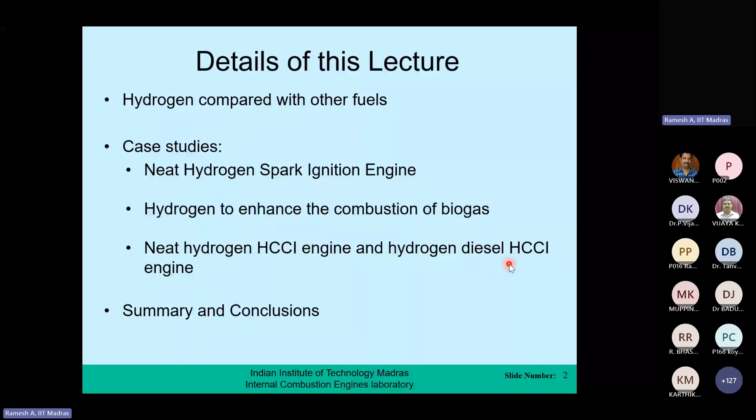Now, we know that hydrogen is the simplest of all fuels. It is abundantly available. Unfortunately, it's not available in the free state; it's available in combination with other elements. So we need to really separate it out and bring it out, and that needs some energy, as we all know. It's a clean burning fuel.

It does not by itself produce any oxides of nitrogen, hydrocarbons, or carbon monoxide, so it's a clean burning fuel. Of course, when you burn hydrogen in air, the oxygen in the air can combine with the nitrogen in the air and form oxides of nitrogen. But as a fuel, it doesn't produce anything which is harmful.

Then it has got a very high flame speed, meaning its combustion rate is extremely high. This in an engine leads to good thermal efficiency. In an engine, we all know the combustion has to be rapid for efficiency to be high, and high flame speed automatically gives rise to good thermal efficiency.

Hydrogen also has wide flammability limits, which means that you can use a small amount of hydrogen and a large amount of air, and you can also use a relatively large amount of hydrogen and a relatively smaller amount of air. Still, hydrogen will burn.

This makes it very attractive from the point of view of an engine, because you can now do what is called qualitative control, like how we control a diesel engine. We don't have to use a throttle. It can also enable burning very lean mixtures, that is, a lot of air and less fuel, which means high efficiency because combustion can be complete, and you also get low levels of emissions, particularly oxides of nitrogen.

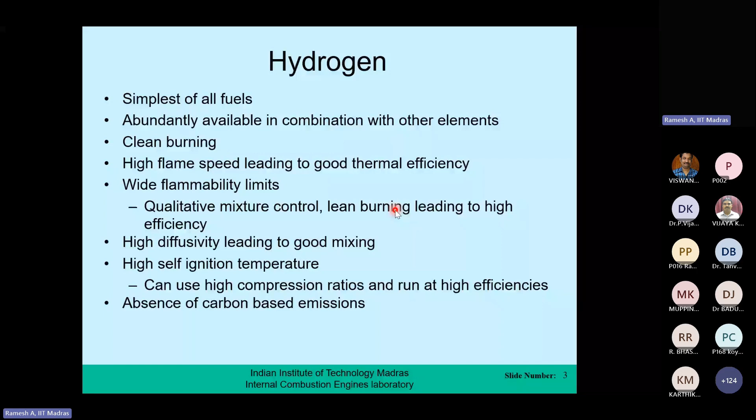The spark leads to a very high temperature, initiates the combustion reactions, which become exothermic and self-sustaining. Then you have a flame, which moves through the air, radially from the spark, ideally. This flame is basically a region where the reactions occur, and if the reaction rate is high, the flame can propagate fast. So in a hydrogen engine, in a hydrogen-air mixture, the flame propagates quickly and goes towards the end of the combustion chamber.

On the combustion chamber wall, since the temperature is low, there can be a small amount of fuel left unburnt, and we call this wall quenching. In a normal gasoline engine, it leads to hydrocarbon emissions, but in a hydrogen engine, it will of course lead to some hydrogen coming out.

In a normal engine, what happens is the end gas—as this flame is propagating, the surrounding gas gets compressed because the pressures go up, and it also gets heated because of heat transfer and compression. The surrounding air-fuel mixture can auto-ignite on its own, suddenly, even before the flame reaches it, and that we call knocking.

In a hydrogen engine, this is less likely to occur because the flame propagates fast and doesn't allow this auto-ignition. Also, this charge does not auto-ignite easily because its self-ignition temperature is high. So this kind of knocking does not occur, but the normal flame propagation itself becomes so fast that combustion can be very rough and look like knocking. So hydrogen combustion leads to knocking, but that knocking is not like gasoline engine knocking—it is just the fast combustion that results in knocking.

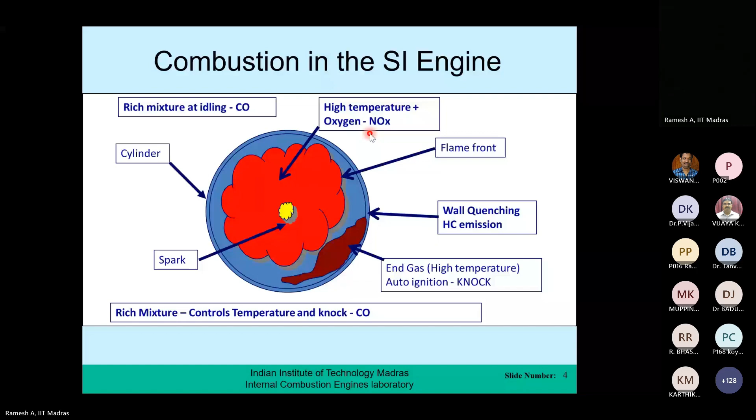The fuel properties required for an SI engine are mainly governed by the mixture. The SI engine uses a homogeneous fuel-air mixture, so it needs a fuel that can easily mix. Hydrogen is an ideal fuel for this. A spark initiates a flame, giving high combustion rates which can lead to high efficiency, close to the Otto cycle.

High combustion rates are associated with fuels that have a high flame speed. That is, high combustion rates mean high flame speed. The start of combustion is controlled by the spark.

The air-fuel ratio, or equivalence ratio, is another important parameter, and the charge is normally throttled to control the output of the engine. That is, you normally control the air and fuel going into the engine to control the output.

But in a hydrogen engine, this is not required, because you can have a wide range of air-fuel ratios. It's enough to only control the fuel and not the air, and still the engine will run. This is a big advantage.

Knocking is a problem that limits performance. In a gasoline engine, HC, CO, and NOx are the main problems, but in a hydrogen engine, NOx is the significant problem.

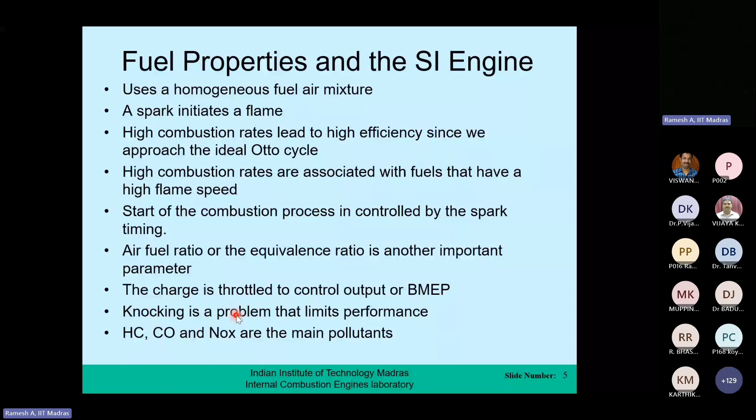Now, coming to the CI engine, which is also an engine where you can use hydrogen, you have a central combustion chamber, a fuel injector, and you compress only air.

At the center of the combustion chamber, normally you have a fuel injector, and this fuel injector sprays fuel at high pressure. The fuel atomizes, mixes with air, then self-ignites.

That means the fuel required for a diesel or compression ignition engine should have a low self-ignition temperature. Hydrogen has a high self-ignition temperature, so it is certainly not the fuel for a CI engine, but it is used in the CI engine in different ways.

In the CI engine, there is a spray, then fuel droplets, and fuel droplets mix with the air and burn. But that is not the case with a hydrogen CI engine, because you cannot just inject hydrogen like this into an engine.

So the point to note here is that in a CI engine, direct use of hydrogen is not so easy, because hydrogen does not self-ignite. You have to indirectly use hydrogen in a CI engine, unless you are using very, very high compression ratios.

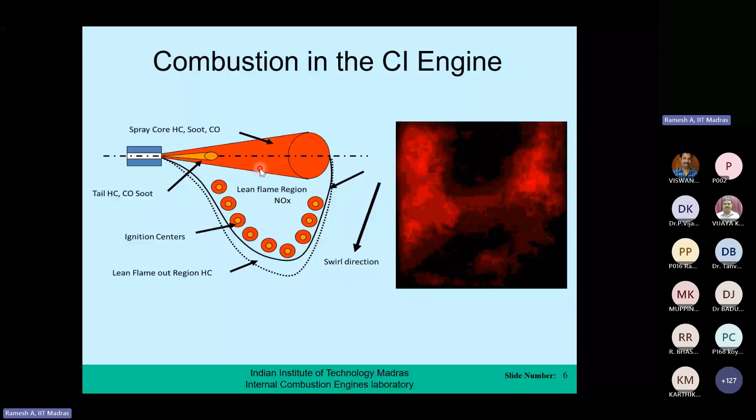For the CI engine, air alone is inducted and compressed. Fuel is injected at the top dead center, and the fuel needs to have a high cetane number. The fuel, spray, and air motion are all important.

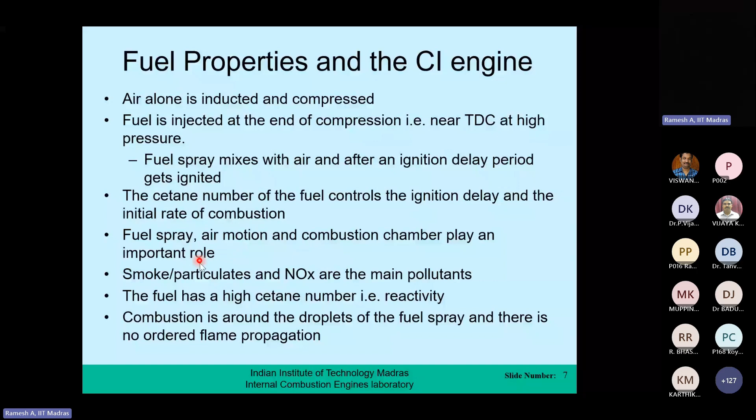Normally in the CI engine, you have smoke and NOx, and this fuel has to have a high reactivity. Cetane number is associated with reactivity, and hydrogen does not have high reactivity. It needs a very high self-ignition temperature to initiate combustion, but after that it becomes quite fast in the combustion process.

So given this, let us now look at the properties of hydrogen and compare them with different fuels, particularly natural gas, since it is another widely used fuel. Hydrogen is a simple fuel with no hydrocarbons in it, whereas hydrocarbons can produce different combinations and emissions, which is certainly not the case with hydrogen.

The heating value of hydrogen is extremely high: it's 50 megajoules per kg for natural gas, and 120 for hydrogen. That means per kg of hydrogen, you can release very high levels of energy.

Unfortunately, its density is extremely low, so the volume of hydrogen required to be stored, even for unit mass, is extremely high. This actually offsets the advantage of its high calorific value.

In one conventional cylinder where hydrogen gas is stored at about 200 bar, you can store very little hydrogen, something like 0.6 to 0.7 kg, depending on the pressure, which is insignificant compared to how much you can store in a gasoline cylinder.

So from the point of view of storage and transportation, hydrogen has some problems. The flame speed of hydrogen is extremely high, many times higher than natural gas, meaning combustion can be completed almost instantaneously. This can lead to very high efficiencies, but it can also lead to very high rates of pressure rise and knocking.

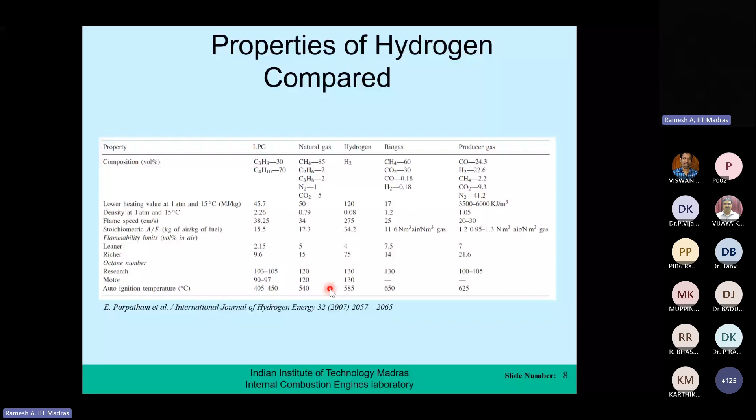Now if you compare hydrogen and gasoline when it comes to a spark ignition engine, I'll not go through all the properties, most of them are common. If you look at the density, you see the big difference - hydrogen has a very small density, gasoline being a liquid has a high density. The limits of flammability are wide, not so wide. And then the ignition energy that is required.

This is another important property of hydrogen. The amount of energy that you require to ignite hydrogen is extremely low as compared to gasoline, significantly lower. This is an advantage because it can be easily ignited, but it's also a disadvantage, because even a hot spot in the engine would undesirably ignite it and lead to problems of combustion. So this is good and bad - good from the point of view of proper ignition, but bad from the point of view of ignition control.

And if you look at the auto ignition temperature, it is significantly higher than gasoline, which is an advantage in a spark ignition engine. The adiabatic flame temperature is more or less comparable to gasoline. And you can also see that the octane number is extremely high, much higher than gasoline.

Another important thing you see here is the flame quenching distance, which is the minimum gap through which the flame can pass. A gasoline-air mixture flame cannot pass through a gap less than 0.2 centimeters, whereas in the case of hydrogen, it can pass through a gap of 0.064 centimeters. That means any small gap can also enable hydrogen flame to pass through, which is again not a desirable feature from the point of view of safety.

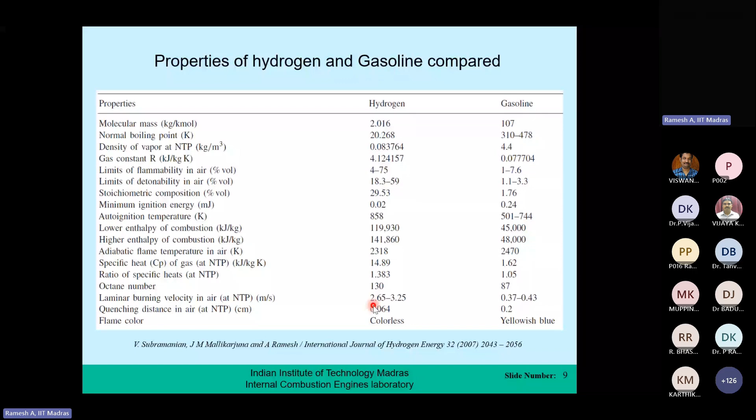Coming to the important properties of hydrogen: the low ignition energy requirement allows engine operation with lean mixtures without misfire, but it can also lead to some safety issues. The very high flame velocity again enables lean burning and high efficiency, but it can also lead to knock. Its high auto ignition temperature is desirable because it will not lead to any knock in a spark ignition engine - desirable from the SI engine point of view, but not desirable from the compression ignition point of view.

Another important thing with hydrogen is it is prone to surface ignition - any hot spot on the engine can very easily ignite hydrogen, causing pre-ignition and undesirable ignition, which is again a problem. Its energy density on the mass basis is good, but very low on the volume basis, meaning the engine normally leads to lesser power. When you mix hydrogen and air, the hydrogen being very low in density displaces a lot of air and occupies its volume, so the hydrogen-air mixture going into the engine does not carry enough energy because air has been displaced. This means a hydrogen engine will develop lower power than a gasoline engine unless you supercharge or turbocharge it.

We also have difficulties in storage and handling, and it is difficult to detect a hydrogen flame because it is colorless. It has high diffusivity, which is good for mixture formation and also good from a safety point of view. It has low quenching distance, which means hydrogen flame can pass through even small spaces, which is again a safety concern.

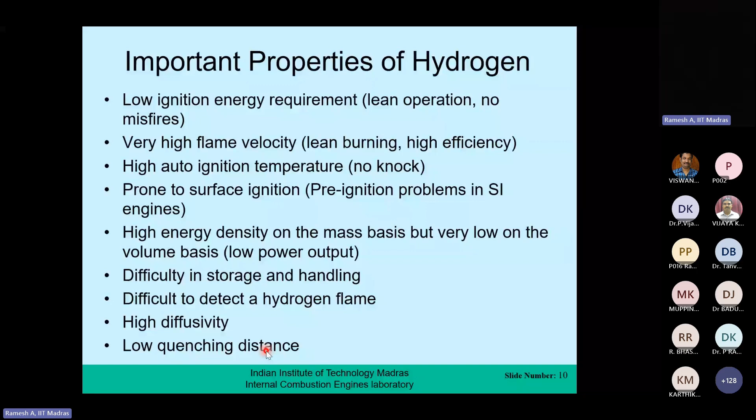These are the important properties of hydrogen, and they lead to several challenges: challenges in storage and transportation, in augmenting engine power, not being able to use hydrogen in a compression ignition engine, and not being able to inject hydrogen easily because it's a gas. It's not so easy to inject a gas into an engine as it is to inject a liquid fuel, because liquid fuels can be very easily raised in pressure, but gaseous fuels need a lot of work to raise the pressure.

Low ignition energy also creates backfiring problems and self-ignition problems through hotspots. There's low energy density on a volume basis, and probability of leakage because hydrogen is a small molecule that can easily leak out and burn around the engine without the user knowing. Hydrogen can also lead to high combustion rates and knocking, so we need to use lean mixtures, which again gives reduced power.

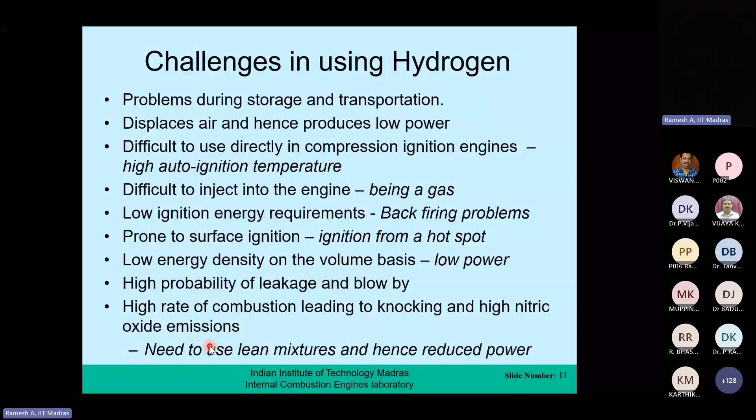So there are some challenges in hydrogen, but there are also some big attractive features. Let us see how hydrogen actually behaves on engines using three case studies. I want to stress once again that several safety measures have to be taken when hydrogen is used on an engine, otherwise it can be quite dangerous and disastrous.

The first problem comes because a hydrogen flame cannot be detected. We have had instances in the lab where hydrogen was leaking and sometimes it even caught fire, and we were not even able to know that it's burning unless we used special devices like thermal imaging to really see whether there was a hydrogen flame.

You need to have what is called a flame arrestor. Hydrogen is such an easily ignitable fuel that the flame can pass through the supply line itself, if there is some air present, and go back to the cylinder and create problems. So you need a flame arrestor connected to the fuel line to arrest any backfire in case air is unknowingly mixed with the hydrogen.

Sometimes we need to use two flame traps, one dry and one wet. I'll show this to you when we look at some of the experimental setups. On top of all this, we definitely require hydrogen leak detectors throughout the experiments to trace any leakages, since hydrogen also leaks.

Let me show you through a picture. If this is an engine and you compress hydrogen, it can leak from the cylinder above the piston, down into the crankcase. It could accumulate there, and if the crankcase is not properly ventilated, it can explode in the crankcase, and since this is a thin metal casing, it can actually explode.

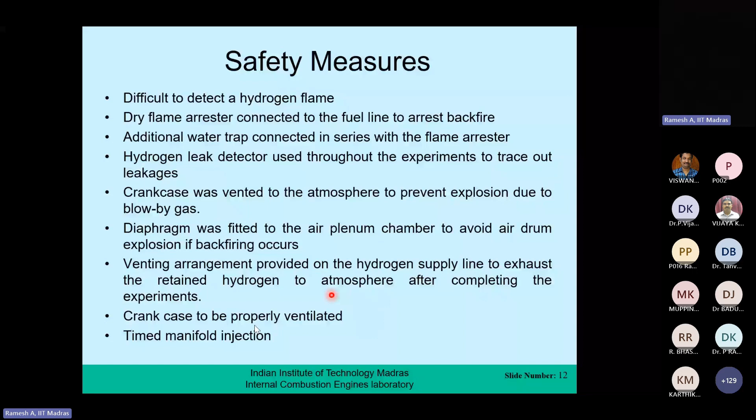It is always good to use timed injection of fuel rather than mixing the air and fuel beforehand. That means you allow injection only when air is going into the engine, so that you don't retain any hydrogen in the intake manifold when suction is not occurring. These are some of the precautions one has to take when using hydrogen in an engine.

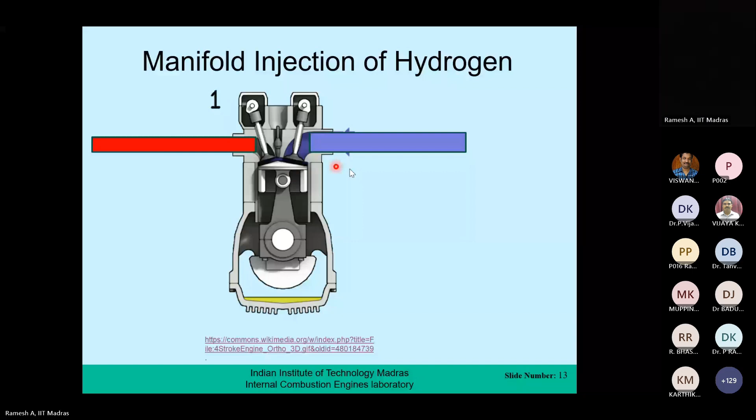Now, coming to the methods to use hydrogen in engines, basically there are 3 methods. The first method, and the simplest and preferred method, is the spark ignition engine.

In the spark ignition engine, we have the engine which can operate in the lean burn zone or in the stoichiometric zone. In hydrogen, we always prefer the lean burn arrangement, where you have a lot of air and less fuel. Because hydrogen can burn lean, it's easier to work in this mode, and in this mode you can get complete combustion and good efficiency. So one prefers to use lean burn.

But when you use lean burn, a lot of air and less fuel, you automatically end up with lesser power because you are not putting in enough fuel. And hydrogen, on a volume basis, already has low density and energy content. So we end up getting lower power from a normal SI engine as compared to a gasoline engine. So it may be important to supercharge a hydrogen engine when used in the spark ignition mode.

The next mode, which is again somewhat popular, is the CI engine mode. In the normal CI engine, that is compression ignition engine, we already saw that if you compress air alone and try to inject hydrogen into the cylinder, injection itself is difficult. And even if you are able to inject it, combustion will not occur because hydrogen requires a high temperature for ignition. That means the air has to be compressed significantly, which is not practically feasible. So hydrogen in the CI engine is not used in the normal form.

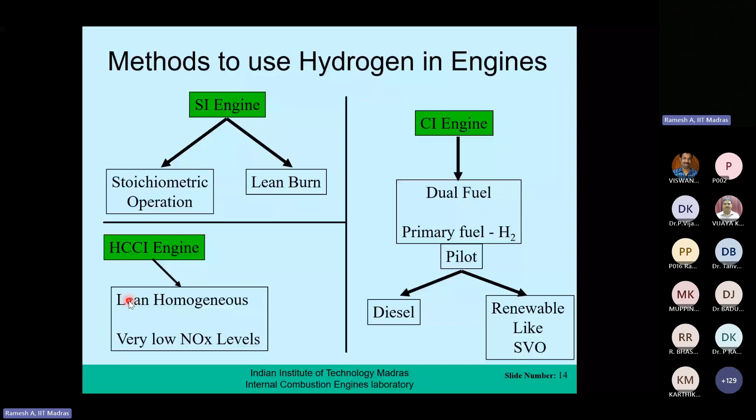So each one of them has some advantages and some problems, as we'll see. But the SI engine is the easiest method.

Now, if you want to compare the CI, SI and HCCI engines: the CI engine uses a spray. You compress air and then inject a spray of fuel which easily self-ignites. Unfortunately, that spray leads to very high local temperatures and high levels of NOx. So one problem with the CI engine is high NOx, and another is high smoke because it is not well mixed.

In an SI engine, you have a flame which is propagating, and in the flame region temperatures can be very high, causing NOx. In the HCCI engine, which is something in between SI and CI, you have a lean mixture like the CI engine, and you also have auto ignition, but you don't have a spark and you don't have a flame like the spark ignition engine. So it is a lean homogeneous mixture, like in the spark ignition engine, but with compression ignition like in the compression ignition engine.

So the ultimate advantage is that there is no flame here. It is combustion everywhere in the combustion chamber, and you reach very low temperatures during combustion compared to the other two engines. So you have negligible NOx, and even with fuels like diesel, negligible smoke. These are the advantages of HCCI, but combustion control is very difficult, and load range is also limited.

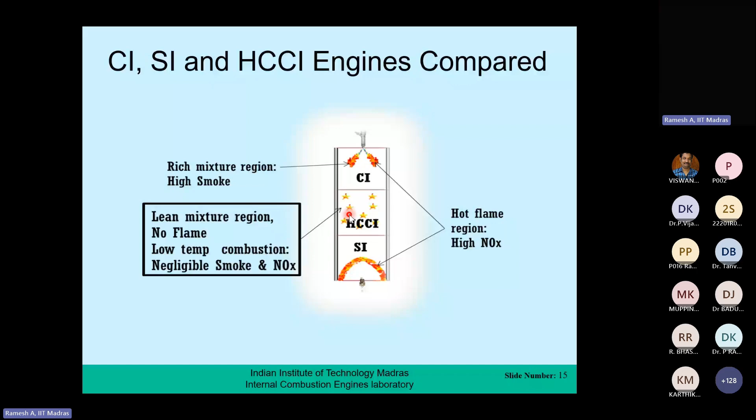So let us see how these three fare. I first take a case which is utilization of hydrogen in a spark ignition engine. These are some experimental results that I'm going to show you, which we did on a spark ignition engine. This is an automotive engine, a single cylinder automotive engine, but we converted it into a constant speed engine for hydrogen experiments. So basically we are looking at something like a genset application.

What actually happens here is you have a homogeneous mixture of air and hydrogen sucked into the engine. This hydrogen is injected into the intake manifold along with air. I'll show the schematic. This injection can be timed manifold injection, or it can be untimed manifold injection, meaning you simply keep injecting the required amount of hydrogen into the intake manifold, or you inject the hydrogen only when the air is going into the engine. So it can be timed or untimed.

The advantage and disadvantage are here. If you have timed manifold injection, it's slightly complicated, but you will not have any hydrogen-air mixture left in the intake manifold after it is sucked into the combustion chamber, so there'll be no problem of back flash. But in untimed manifold injection, there'll be a possibility of back flash—sometimes flame can come back, as I told you.

And you need a spark plug which will not become very hot, because hydrogen can be easily surface ignited. If a spark plug is hot, it can ignite the hydrogen-air mixture even as it is going inside. So you need a low temperature spark plug—the spark plug of a normal engine has to be replaced. Then you still have pre-ignition problems from some hotspots which you have to control.

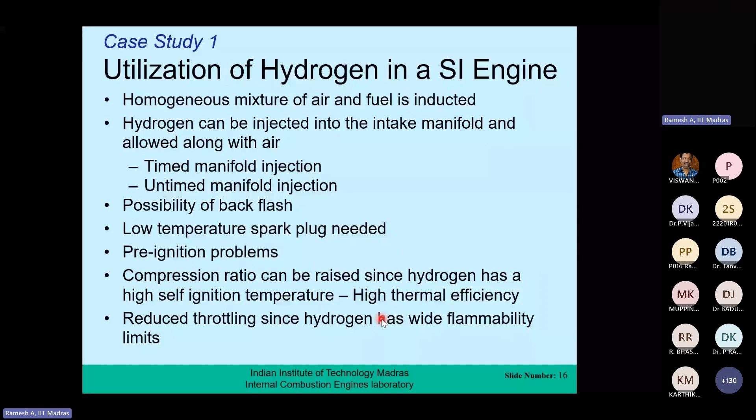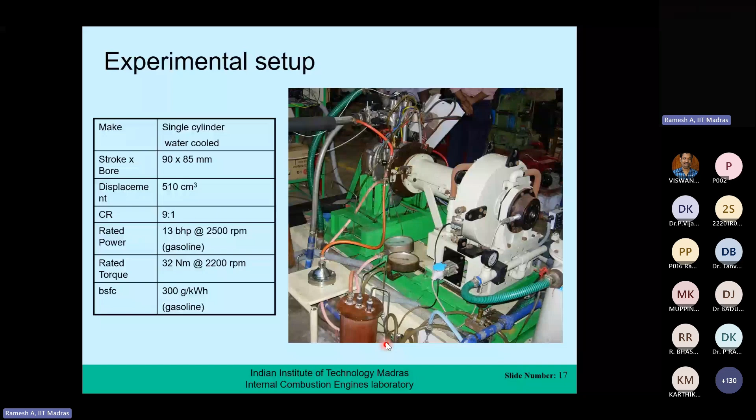So this is the figure of the experimental setup that we used. I am specifically showing this to show you the safety devices that are here. First, the hydrogen comes from a cylinder kept outside the lab. It comes inside through a water trap—hydrogen is flowing into water, bubbling through it, and then coming out. Then it goes into another flame trap, which is a dry flame trap.

Hello? Hello? I see some disturbance. Hello? Am I audible? Yes sir, yes sir, it is muted now, sir.

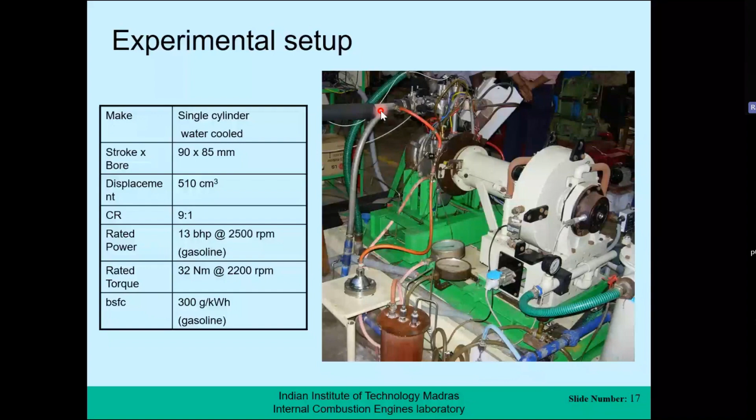You should remember that this was done some 10, 12, 15 years back. So during that time, these hydrogen injectors were not so common. Even now, hydrogen manifold injectors are available, but hydrogen direct injectors are not available, so it's still not very widely used. So this is injected directly into the intake manifold, very close to the intake valve, so that no hydrogen is accumulated in the intake pipe.

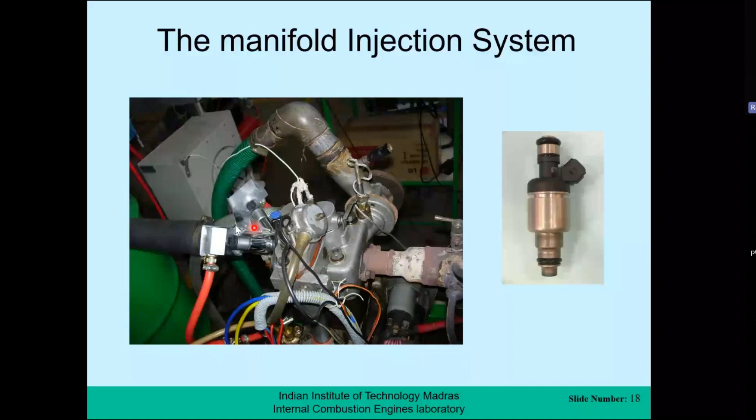Now this shows the schematic: the water flame trap, then the dry flame trap, then the intake system, and then you have the injection circuit and the injection system into the engine, the gas injector, and the exhaust analyzers and the dynamometer and other things.

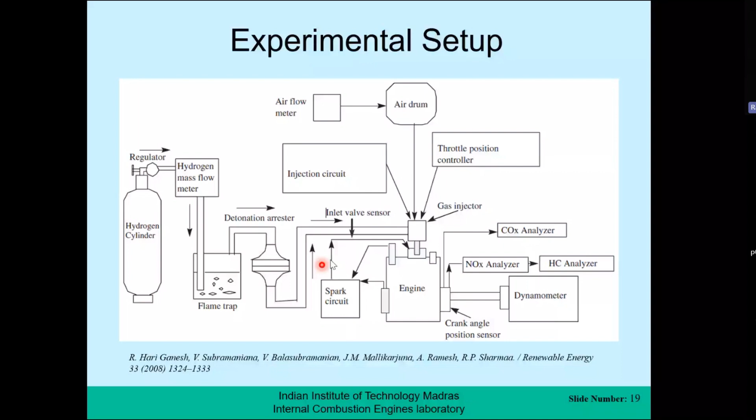So these are the specifications of the engine. It's an automotive engine, but as I told you, it has been converted to work as a stationary engine. And this engine can run on gasoline basically, but we have now converted to run on hydrogen with its new injection system.

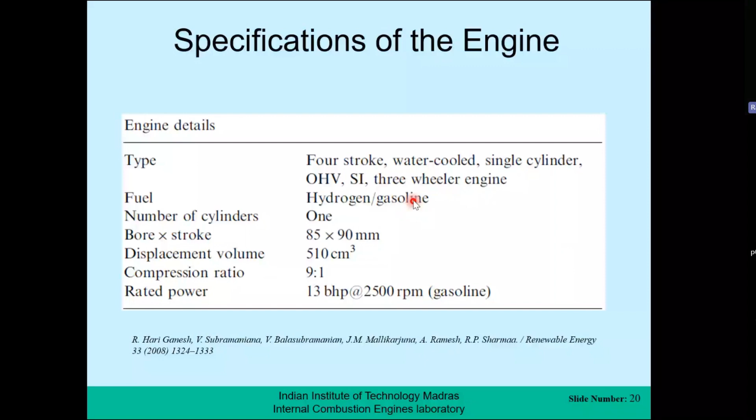So I'll just skip this. So if you look at the results that we get out of this engine, you can see here that on the x-axis we have equivalence ratio. For those of you who are not familiar, equivalence ratio is the air to fuel ratio that the engine is actually using, fuel to air ratio, mass of fuel by mass of air that the engine is actually using,

divided by the mass of fuel to mass of air under stoichiometric conditions. That means if the equivalence ratio is greater than 1, you're using more fuel than the amount of oxygen that the air can support. And if it is less than 1, you're using less fuel than what the available air can support. So this is rich mixture, this is lean mixture - lean in hydrogen, rich in hydrogen. So 1 is exactly correct, chemically correct amount of hydrogen.

So you are seeing here equivalence ratio on the x-axis, and you are now comparing gasoline and hydrogen. Let us not worry about this 4 bar, 5 bar - these are two injection pressures for hydrogen, and you essentially see that since hydrogen is a highly diffusive gas, the injection pressure does not matter so much. Hydrogen, even at 4 bar, it spreads as easily as at 5 bar. So this is just to show that injection pressure does not affect significantly.

But the point to note here is the power that the gasoline engine can produce is higher than the power that the hydrogen engine can produce. And the equivalence ratio to which you can comfortably go with a hydrogen engine is less than what you can use in the gasoline engine. In a gasoline engine, you can even use richer than stoichiometric mixtures. In a hydrogen engine, when you go close to stoichiometric, there is a significant increase in NOx, so you wouldn't want to go very close to stoichiometric. And the engine combustion rate also becomes very high.

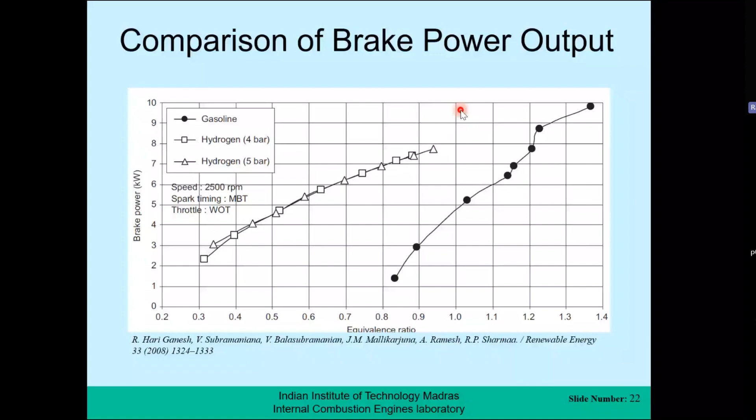Now this shows the efficiency of the engine versus brake power. So this is the efficiency of the gasoline engine, and this is the efficiency of the hydrogen engine. So the efficiency of the hydrogen engine is always higher than the efficiency of the gasoline engine, even at the same compression ratio - you can see these two are for hydrogen. And as I told you, with hydrogen, you can raise the compression ratio because its self-ignition temperature is higher and it will not auto-ignite. So if you raise it, you are likely to get higher efficiencies than even what is seen here.

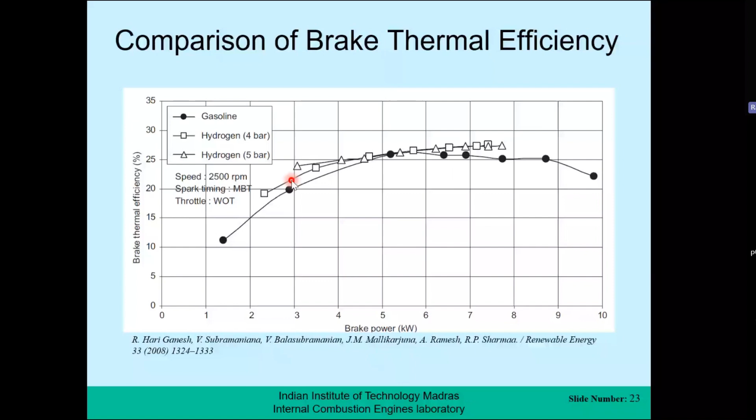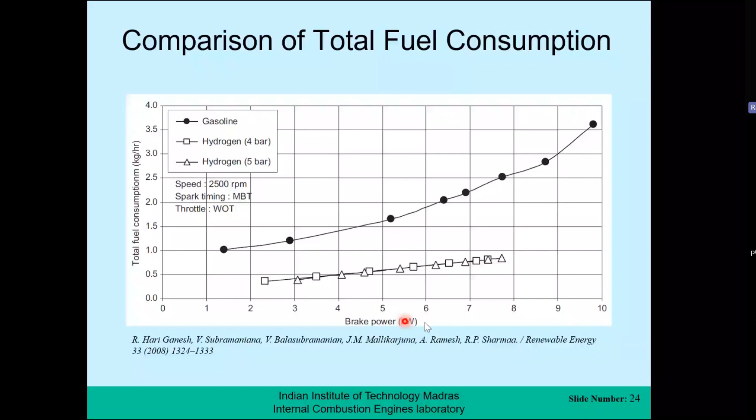So the hydrogen engine is definitely more efficient than a gasoline engine, even without any big modifications, but still higher efficiencies can be reached. Now, if you look at the fuel consumption, the total amount of fuel in kilograms per hour, obviously the hydrogen fuel consumption will be less because its calorific value on the mass basis is much higher. So gasoline in kg per hour is much higher, hydrogen in kg per hour is much lower - this is just because its calorific value on the mass basis is much higher. But if you look at the volume flow rate, gasoline will be significantly lower than the hydrogen's volume flow rate because it's highly dense as compared to hydrogen. But this just shows the mass flow rates.

Now, another important feature is the ignition timing. What is this ignition timing? It is the timing at which you have the spark. You take air fuel mixture into the combustion chamber during suction stroke, then compress it, and when the piston is about to reach top dead center, you fire the spark, a few degrees before top dead center. That is the ignition timing: degrees before top dead center. So if I say it is 15 degrees before top dead center, it means the spark has occurred 15 degrees before the piston reached top dead center.

Why do we ignite it before it reaches top dead center? Because combustion takes a finite time. If you ignite the spark at TDC, the combustion may run through the expansion stroke. So you want it phased properly around TDC so combustion occurs close to TDC. Spark timing is always before top dead center. If the fuel burns slowly, you have to start the spark very early. If the fuel burns fast, you can go close to TDC before starting the spark.

So that's what you see here. With gasoline, the spark has to be significantly advanced, and this high spark advance is required to take care of the slow burning of gasoline. Whereas with hydrogen, the spark can be very close to top dead center, sometimes almost at TDC. When using a high amount of hydrogen and small amount of air, with equivalence ratio close to stoichiometric, the combustion of hydrogen is very fast, so you don't have to advance the spark significantly at all. There's a wide difference between the spark timing of hydrogen and gasoline. This has to be taken care of right at the beginning. We cannot use such timings, because then, even before the piston reaches top dead center, combustion will be complete, resulting in very poor efficiency with hydrogen unless it's properly timed.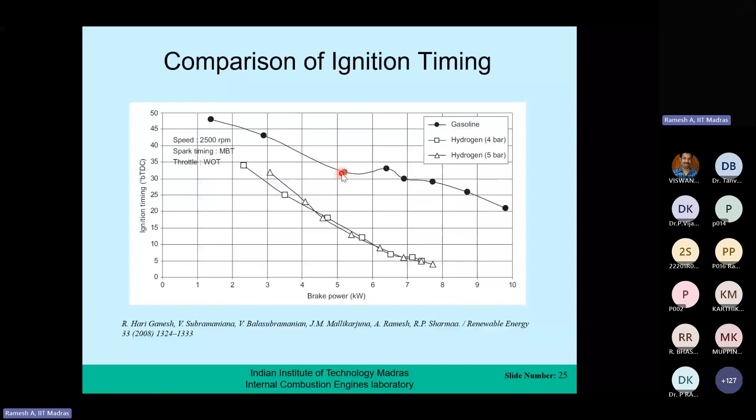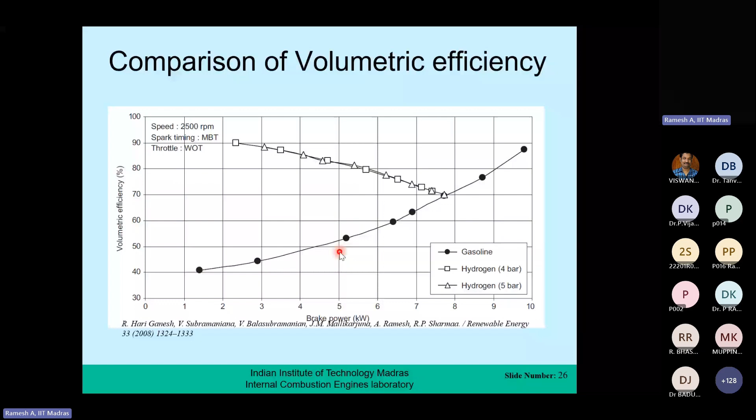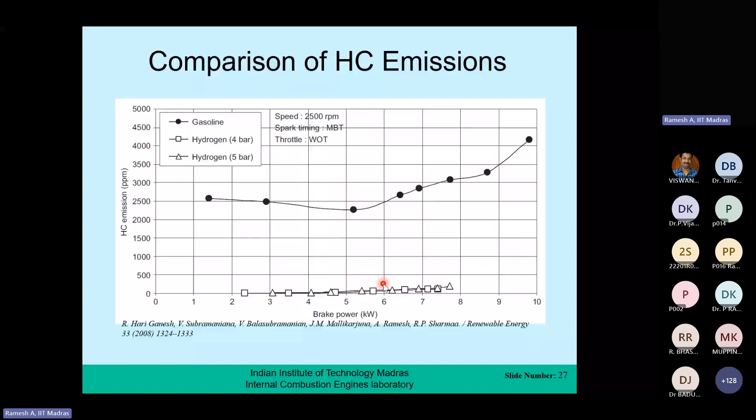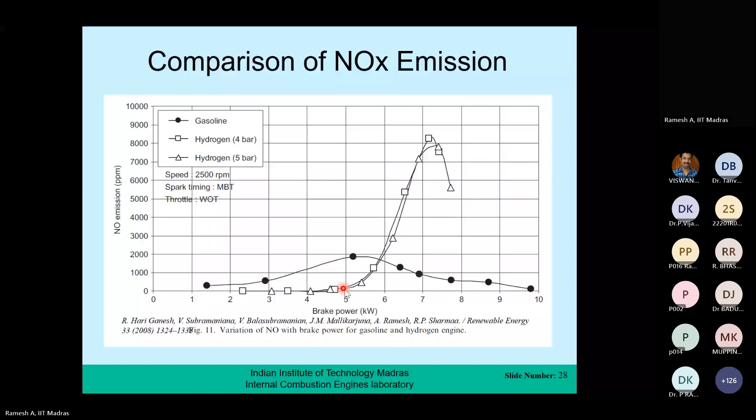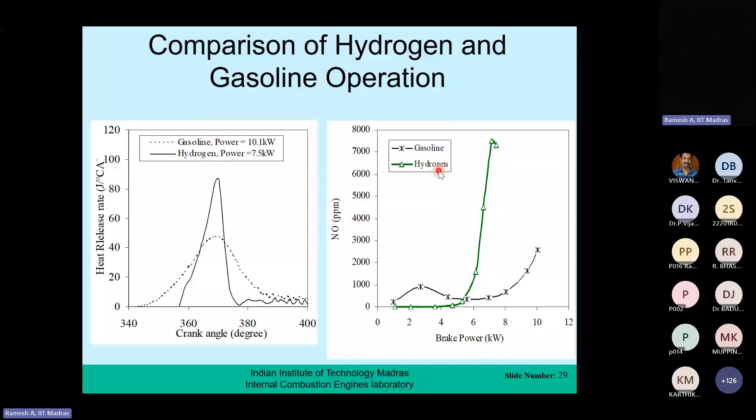NOx is the main problem, and the other problem is the lower power that you get from the hydrogen engine. The lower power problem can easily be tackled by using supercharging, so we are not going to look at that. But the higher NOx problem has to be solved using different methods. There are some standard methods which can be adopted to control NOx, and we'll see how these actually work on a hydrogen engine.

If you look at NOx control methods, NOx is influenced by the availability of oxygen, the high temperatures that exist during combustion, and the time for which the charge is exposed to these high temperatures and oxygen concentration. Nitrogen is always there, so its concentration is also important, but since nitrogen is always present we don't even talk about it. So concentration of oxygen, temperature, and time—all three are required for NOx. So NOx is a rate controlled process.

If you give more time, more NOx will be formed. If you have more temperature, also more NOx will be formed, and higher concentration of oxygen and nitrogen will also lead to higher NOx. So NOx is influenced by all this, and in a hydrogen engine there is oxygen because the mixture is normally lean, and temperature is also very high because the combustion is rapid. Only the time of exposure is not very high because combustion is rapid, but the other two are enough to actually raise the NOx level.

So one can think of different methods. One of the methods which SI engine designers very frequently follow is retarding the spark—that means you don't keep the right spark timing, you slightly retard it. If you have to have a spark at 15 degrees before top dead center, you keep it at 10 degrees before top dead center, moving it away by about 5 or 6 degrees. So the peak temperature will fall, but there will also be a drop in thermal efficiency—you have to sacrifice efficiency for NOx. This is a simple and easy way to control NOx, and it is also followed.

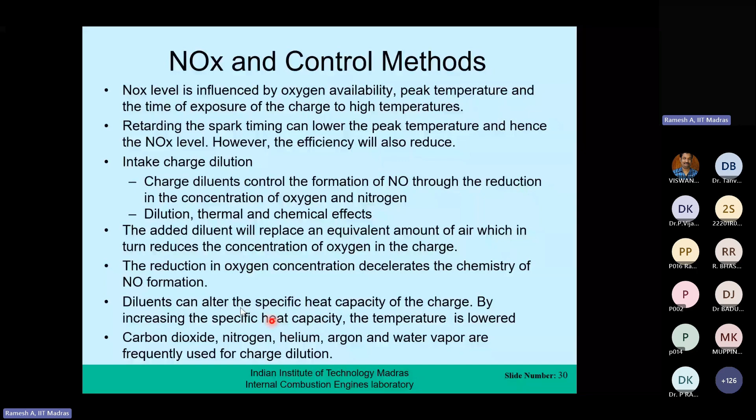So the probable diluents are carbon dioxide, which has a high thermal effect, and nitrogen. You could also use some specific diluents just for the sake of study, like helium, argon, and water vapor—another diluent, because you can easily pump water into the intake manifold. So these are some of the diluents that can be studied, and we studied the effect of carbon dioxide, nitrogen, and also exhaust gas.

So dilution by nitrogen is one of the methods we tried, because if you cool the exhaust gas of a hydrogen engine, it will predominantly contain nitrogen, since once you cool it, the water will get condensed. The output of a hydrogen engine is water vapor, some excess oxygen may come out, and nitrogen will definitely be there. So if you cool the hydrogen engine's exhaust, you'll be left mostly with nitrogen—a feasible diluent that you can try. And some fuels, like biogas used along with hydrogen, can also act as a fuel and give some carbon dioxide.

This could also be used as a diluent. So we also tried carbon dioxide as a diluent. The most sought after method for dilution is the recirculated exhaust, which is widely used in many engines, so that also has been tried. The recirculated exhaust from a hydrogen engine will contain steam, because of water vapor, and it will also contain nitrogen, so it is something in between these. So these three diluents were actually considered. Let us look at how the results show up when we have these diluents.

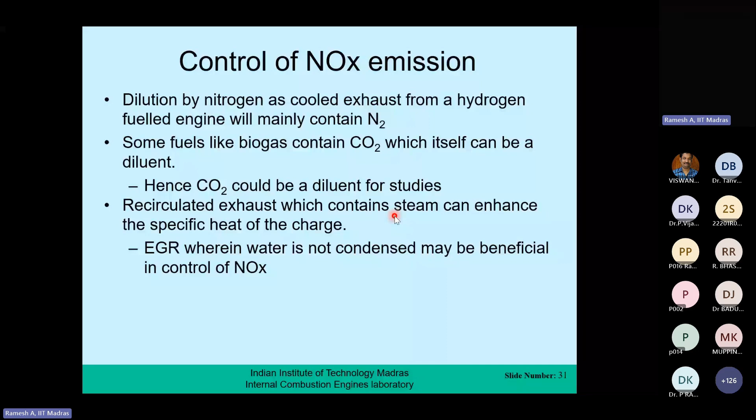Before we move ahead, let's look at the thermal efficiency versus equivalence ratio once again, bringing in the effect of equivalence ratio. As I told you earlier, equivalence ratio of 1 means chemically correct amount of fuel and air. Anything less than 1 means more air and less fuel, so combustion can be complete but fuel is lean.

This is mostly a lean mixture, which is what you will normally use in a hydrogen engine. As we keep richening the mixture and going close to stoichiometric, the efficiency goes up. If you lean down, the efficiency slightly drops, because it is a general tendency of any engine that when you lean down, the power output drops, friction dominates, and then efficiency drops. So it's not good to lean down significantly, but this indicates the influence of leaning.

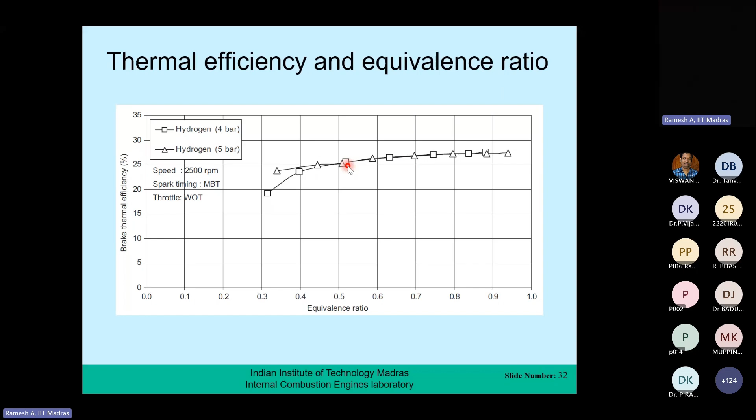Now let us look at what happens if you change the equivalence ratio and what happens to oxides of nitrogen. This is fuel flow rate. If I go to the left, fuel flow rate is reducing, meaning the mixture is becoming lean, while air stays the same. If you go to the right, fuel is increasing, air is almost the same. The oxides of nitrogen peak at around an equivalence ratio of 0.8.

So leaning is always desirable. If you lean below 0.5, or go close to 0.5, the NOx level is negligible. So if you want to operate a hydrogen engine, it is good to operate in an equivalence ratio range of about 0.4 to 0.5. In this region, NOx is not a problem at all, so there's no issue with the hydrogen engine as far as emissions are concerned—it's a clean burning engine.

But the only problem is that at 0.5, your thermal efficiency may be less compared to what you get at higher equivalence ratios, and your power output will also be less. This can be offset, though I won't show it here, by supercharging or turbocharging—throttling and always keeping the mixture at about 0.5 equivalence ratio. If it's too lean, you throttle and bring it to 0.5, and never go to the richer side, because if you do, NOx will go up. If you always stay around 0.5, you can get reasonably high efficiency and also an extremely low level of NOx. This is one of the ways of attacking NOx in a hydrogen engine.

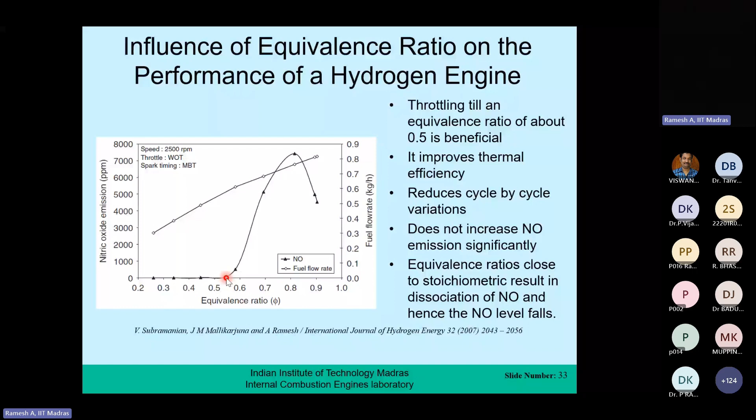But if you use diluents, you can overcome this problem. Now this is a setup we use to study the influence of diluents. As I told you, studying these diluents has practical meaning: nitrogen is like the cooled exhaust of the hydrogen engine, and EGR is what you can very easily get from a hydrogen engine. We studied CO2 just because it has a thermal effect, and we wanted to differentiate between thermal and dilution effects. So we studied all three diluents.

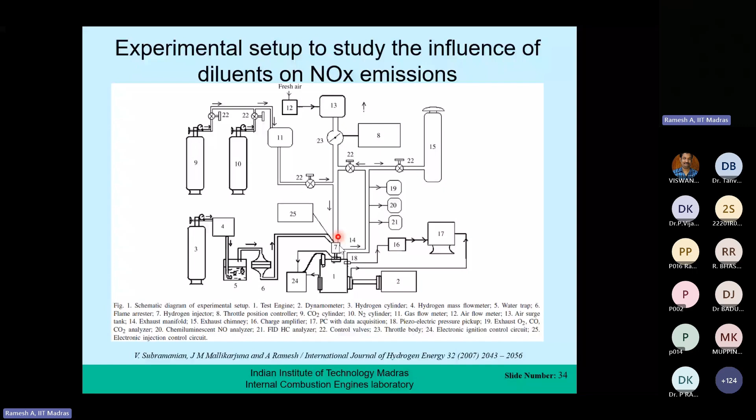The gases were allowed along with hydrogen. So you have hydrogen going through the flame arresters into the engine, and you also have either nitrogen or CO2 going into the intake manifold along with air, with the engine being studied as it was running. First, we compare different methods of reducing NOx. The easiest method, as I told you, was retarding the spark, so we'll look at how effective that can be to reduce oxides of nitrogen.

This shows spark timing versus oxides of nitrogen. You can keep retarding the spark and the oxides of nitrogen will keep coming down—as you retard, the oxides of nitrogen decrease.

This is at a low fuel flow rate, and this is at a high fuel flow rate - that means low power and high power respectively. In both conditions, retarding the spark reduces NOx levels. But what is seen here is that at low loads, retarding the spark can bring down NOx below 1000 ppm, below gasoline levels, very easily. But at high loads, retarding the spark cannot bring down the oxides of nitrogen significantly. At high loads, spark control is not possible for the hydrogen engine's NOx level. That is what this shows.

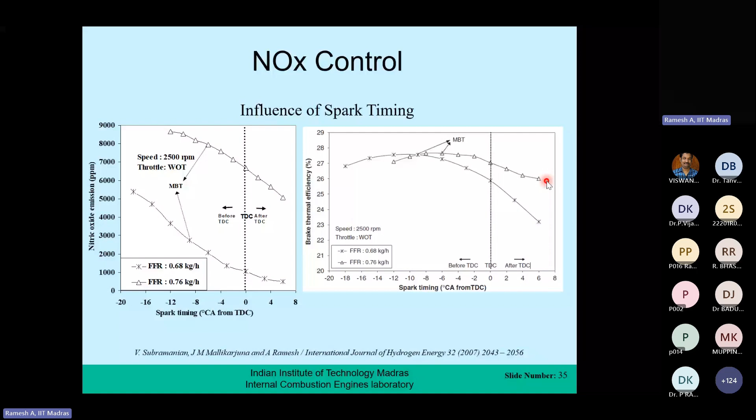Another thing this shows is that even at low loads, if you want to retard the spark to bring down NOx levels, let's say to 0 degrees before top dead center, the NOx level would be something like 1000. But if I come to 0 for the low load application, the efficiency significantly drops. So retarding the spark is not a very good way of controlling NOx in a hydrogen engine. At high load, retarding spark does not even control NOx significantly. So this is an option normally carried out in the gasoline engine - it's not viable for the hydrogen engine because you cannot significantly retard the spark.

So looking at other diluents, NOx control by nitrogen has got a practical application because it is like cooled exhaust of the hydrogen engine itself. Take the exhaust of the hydrogen engine, cool it, condense the water, and circulate it back. Then it will contain, not all the exhaust, but some amount of exhaust circulated back, containing a significant amount of nitrogen. So this is dilution by nitrogen.

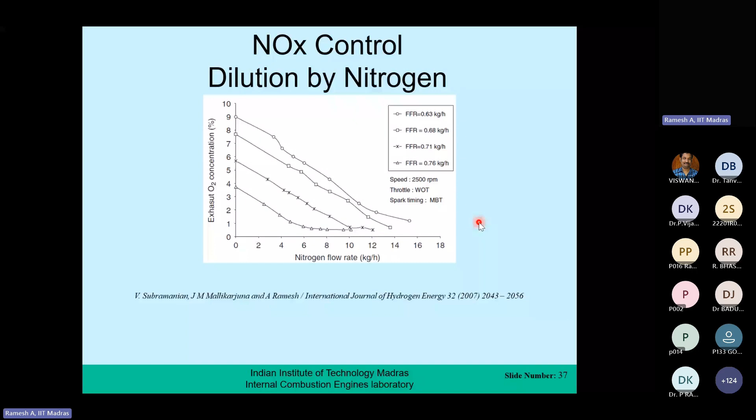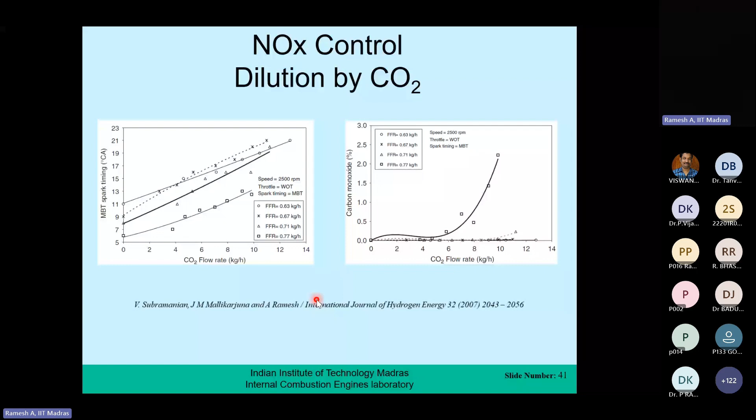Let's go to exhaust gas recirculation. This is a viable method because you have exhaust coming out of the engine - you simply recirculate it. The exhaust from a hydrogen engine contains water vapor, which itself can be a diluent, and it also contains nitrogen like what we saw. So both of them could be beneficial.

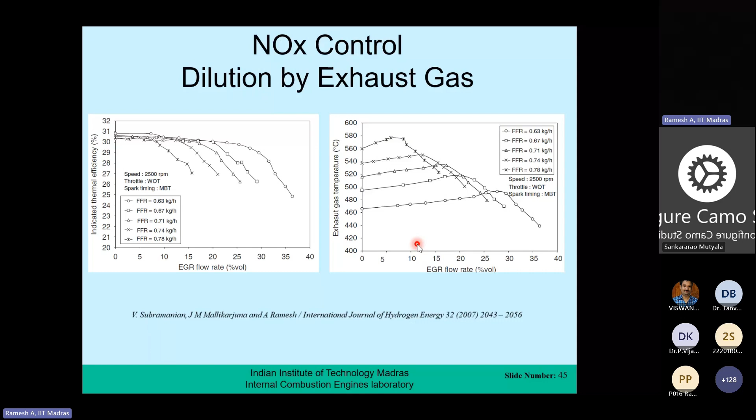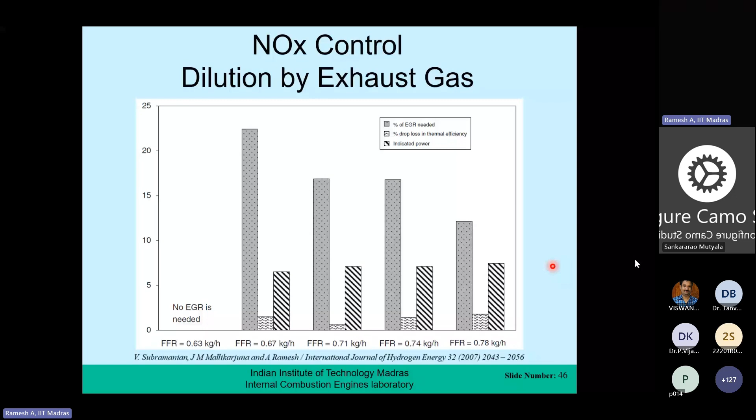When we went to a practical engine to see how it would perform, we measured the amount of EGR required at different loads - low hydrogen flow rate versus high hydrogen flow rate, meaning low load versus high load. The EGR required, the amount of exhaust to be recirculated, comes down as the load increases, and the loss in efficiency is only very small because of this recirculating exhaust, if you want to control oxides of nitrogen to about 1000 ppm. The indicated power is also shown here, obviously going up as the load increases. So this is a viable, practical method of controlling oxides of nitrogen. I'll skip this.

So now we saw how hydrogen can be used in a spark ignition engine. Next, I want to show you how it can enhance the performance of low-grade fuels - how hydrogen can be used along with another fuel so that its performance can be enhanced.

Now what we see here is biogas. Biogas is a poor fuel, but it's almost available free. It is got from the anaerobic digestion of plant and animal matter, organic matter, and it contains about 60% methane, and the rest is mainly carbon dioxide.

So it has a diluent, like what we studied, which can bring down oxides of nitrogen, and it has also got a fuel, but this fuel is highly diluted with carbon dioxide. So normally in a biogas engine, you have problems of efficiency because of the low flame speed, narrow flammability limits, high octane number, high self-ignition temperature, and sometimes some hydrogen sulfide is present, and this gas is corrosive, but H2S can be removed. And CO2 also, if you take efforts, can be removed.

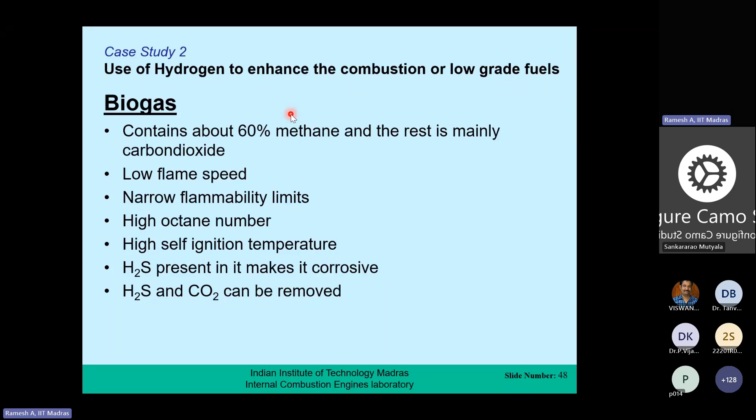So what we are trying to do here is improve the performance of biogas by using small amounts of hydrogen, and studying how much hydrogen is required to enhance the performance of biogas. You may be aware today that we use what is called hythane - natural gas with small amounts of hydrogen, and this hydrogen is supposed to enhance the performance of natural gas. This is something like that: biogas plus hydrogen.

So problems with biogas: the carbon dioxide leads to low flame speed, poor efficiency, low energy content. The hydrogen sulfide leads to corrosion, but it can be removed. There's also water in biogas because the formation of biogas itself is with a slurry, so that again can be removed.

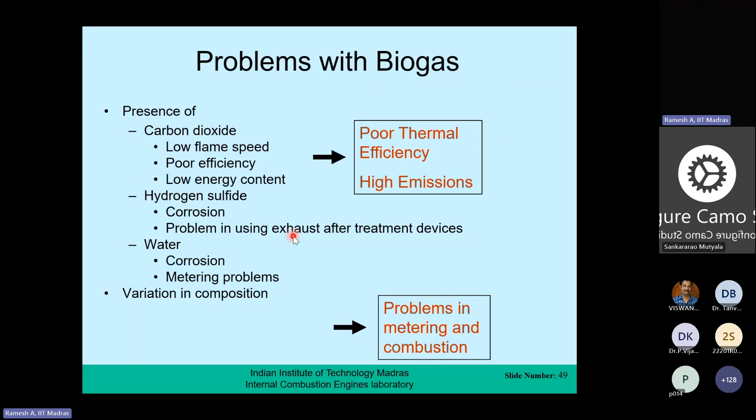It is not necessary that the nitric oxide level goes up, because biogas contains about 40% CO2, and that itself acts as a diluent. So even with addition of hydrogen, the NOx emission does not go up. This is another significant added benefit.

This can be done in large stationary engines. Many community wastewater treatment plants and waste treatment plants use biogas generators, and these are now feeding biogas engines, generating power at some locations. There it is easy to mix a small amount of hydrogen along with biogas and enhance the performance. So this is a viable option.

But when you put hydrogen, you can go leaner without the torque starting to fluctuate. So hydrogen makes the engine operate more stably, meaning more stable torque can be obtained when you mix hydrogen along with biogas. This also is another benefit.

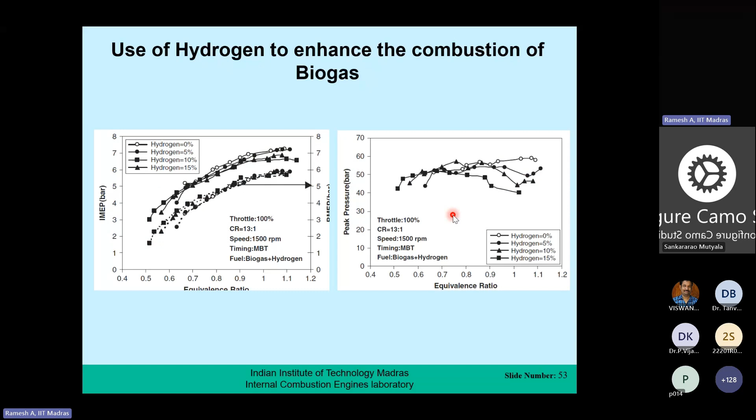So this is one way of using hydrogen along with biogas. The other way is to use what is called a homogeneous charge compression ignition engine. This is a new kind of engine, unlike a diesel engine or a petrol spark ignition engine. It uses a homogeneous mixture like a spark ignition engine, and it uses compression ignition like in a diesel engine. So it's somewhere in between a spark ignition and a compression ignition engine.

The key factor is a very lean mixture of air and fuel is taken during the suction stroke into the engine and compressed significantly. Sometimes its temperature is raised and then it is compressed so that it auto-ignites, self-igniting at multiple points inside the combustion chamber. The combustion rate is high, but the local temperatures are very low. Since the local temperatures are very low, you don't have significant levels of NOx, you have ultra-low levels of NOx. So this is an engine which can run with high efficiency but ultra-low levels of NOx.

But the problem is that when you compress, you do not know when combustion is going to occur, so control of combustion is very difficult. The other problem is you have working only at low load ranges, not at high load ranges. But it is an upcoming method of combustion.

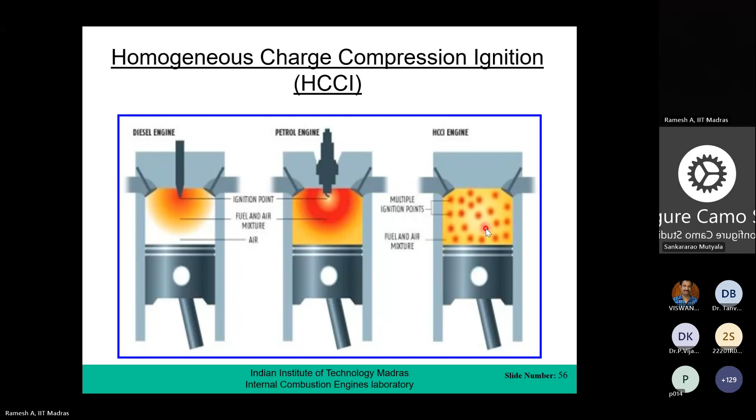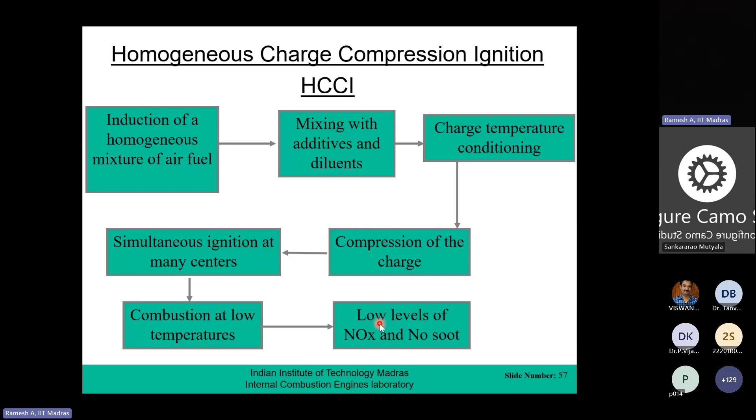So we have to see how this performs with hydrogen. In a homogeneous charge compression ignition engine, or the so-called HCCI engine, you induct a homogeneous mixture of air and fuel. You may add some diluents along with this mixture to condition the charge, and you may also change the temperature by heating the charge. Then you compress this mixture of air, fuel, and additives after it is conditioned for temperature. Then it self-ignites at multiple ignition centers, and combustion occurs at low temperatures, giving low levels of NOx and almost negligible soot. This is the key advantage with the HCCI engine.

Now let us look at a hydrogen-fueled HCCI engine. This is one of the earliest works of hydrogen-fueled HCCI which we did, and it showed promise. We wanted to conduct a feasibility study of using a hydrogen HCCI engine because HCCI was becoming popular, and hydrogen cannot self-ignite so easily. So definitely the intake charge had to be heated, and the equivalence ratio had to be controlled. We wanted to identify the limitations of this mode of combustion, extend the load range, and compare it with conventional diesel operation.

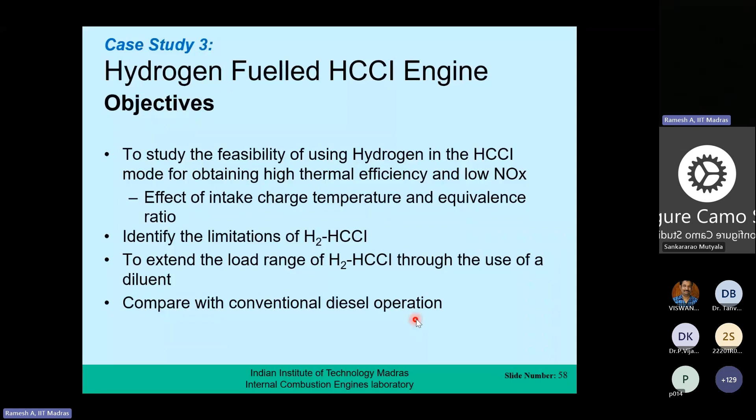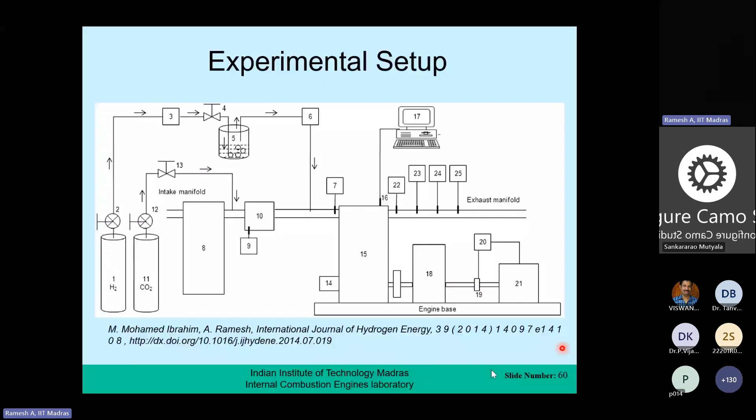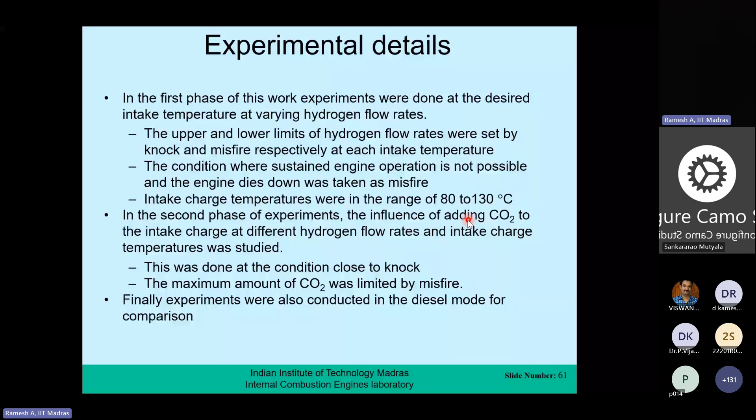The exhaust emissions are measured, cylinder pressure and other important parameters are also monitored. So first we identified the temperature required at different hydrogen flow rates, and second, we tried to see whether adding some carbon dioxide extended the load range. These were the two things we'll see here.

This experiment is slightly involved because hydrogen can very easily misfire or lead to knock, and we are also controlling the temperature of the charge. The temperatures we controlled were all temperatures normally reachable in the engine, because the exhaust coming out is at a higher temperature than these, so we can use the exhaust itself to heat the intake charge.

If you look at this, at an intake temperature of 80 degrees Celsius, you can use high levels of hydrogen with a high equivalence ratio. All these equivalence ratios are much lower than what we saw earlier, because the HCCI engine operates with lean mixtures.

Low intake temperatures are used with high amounts of hydrogen. High intake temperatures like 130 degrees are used with low amounts of hydrogen, because if you use a low amount of hydrogen with a large amount of air, it doesn't ignite unless you raise the temperature. If you use a relatively high amount of hydrogen with a relatively smaller amount of air, it gets easily ignited. But a relatively high amount of hydrogen leads to high power output, so high thermal efficiency and high power output, while low amounts of hydrogen lead to low power output, which is associated with low thermal efficiency. This is what we see here.

So if you want to go from low load to high load, you have to vary the temperature of the charge, then gradually increase the hydrogen. At any given amount of hydrogen, the lowest possible temperature gives the highest efficiency - this is 130, this is 110. So at any given equivalence ratio, the lowest possible temperature gives you the highest efficiency. If you control the temperature of the intake charge properly, you can go from low load to reasonably high load with hydrogen and get reasonably high efficiencies.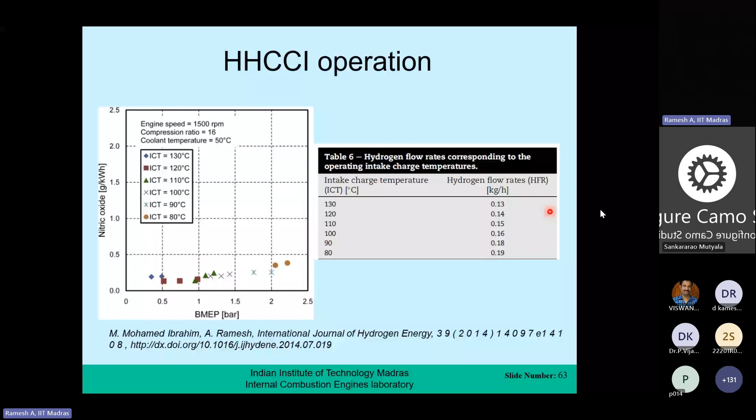Hydrogen HCCI operation has potential to operate with high efficiency, low NOx, and almost negligible other pollutant emissions. The only thing is, with hydrogen, the temperatures have to be controlled. The other main disadvantage is that the BMEP range is limited, and if you want to extend this, you have to supercharge the engine - then you can extend the BMEP range. But this shows that hydrogen HCCI can reduce oxides of NOx and also work efficiently.

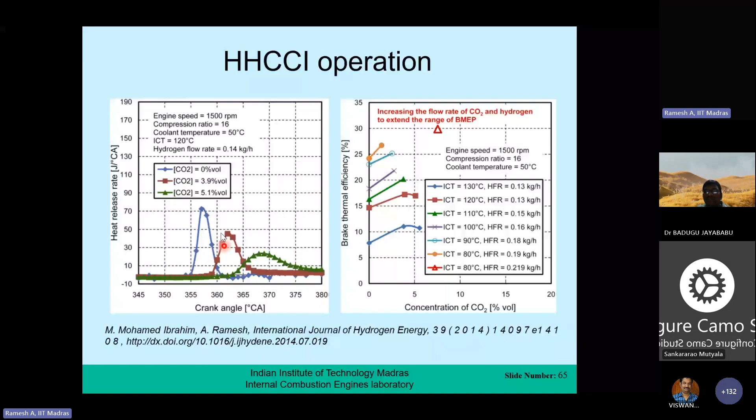One way to retard the combustion process is to use a diluent. Here you see no carbon dioxide, small amount of carbon dioxide, high amount of carbon dioxide. The combustion is retarded, and what occurred very early has now been pushed to the right point to get high efficiency.

It is possible to extend the load range to go to higher BMEPs compared to what we saw earlier by adding a diluent and then raising the amount of hydrogen used. We could progressively add diluent, raise the hydrogen quantity, add more diluent, raise the quantity again, and go up to something like 3 to 3.5 bar of BMEP, which was significant compared to what was reached earlier.

By using a diluent and also by controlling the temperature of the intake charge, a hydrogen HCCI engine can be operated at slightly higher loads, and much higher loads by supercharging, with negligible oxides of nitrogen levels. This is what this work shows.

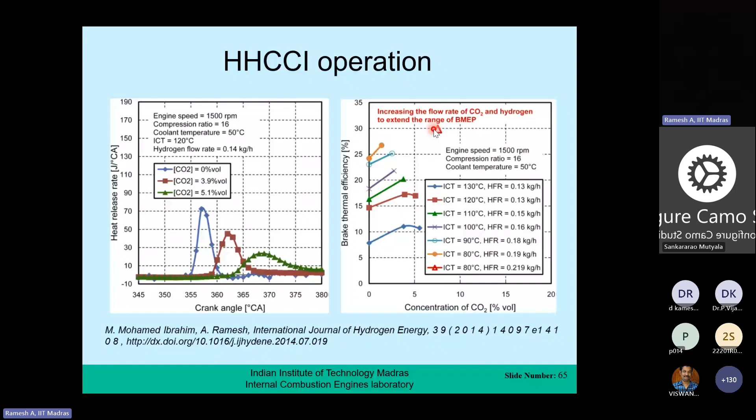This shows the efficiency of the engine when there was no diluent, the blue line, and with this diluent, the brown line.

We also compared our work with what others were doing in the literature available at that time. They went only up to an IMEP of 2.2 bar, whereas we could go to almost double that IMEP, and we could also achieve higher efficiencies than what was achieved at that time.

So it is possible to run a hydrogen HCCI engine with proper control measures, with low NOx levels and very good efficiency. And provided we turbocharge it, we can also boost the power output of the engine. This is what it shows.

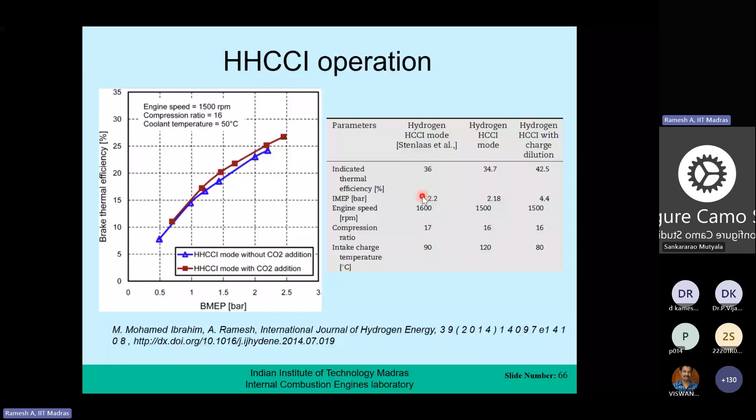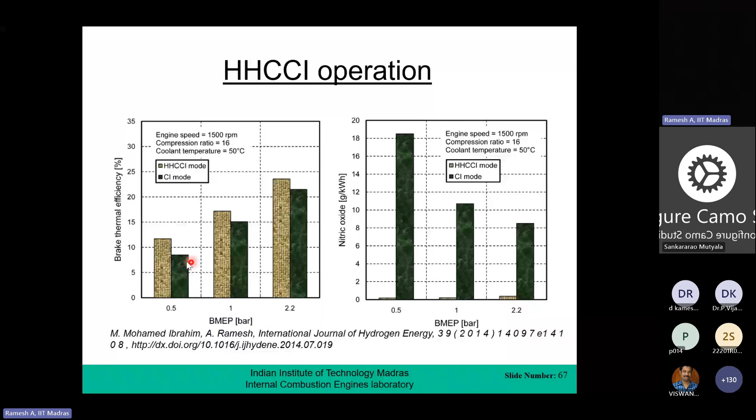When we compare hydrogen operation with diesel, this shows how it compares, at a low output -- all these are relatively low outputs reached by HCCI. You can see the hydrogen HCCI mode is always more efficient than the diesel CI mode, and oxides of nitrogen are just negligible. Diesel's oxides of nitrogen is here, and hydrogen's oxides of nitrogen is somewhere here. So negligible oxides of nitrogen and higher efficiency is what the hydrogen HCCI mode brings.

So I wish to now summarize and conclude since we are nearing the time. The hydrogen HCCI, hydrogen SI engine can operate up to a maximum of about 80% of a gasoline engine's output, but if you supercharge, you can cross that output. The brake thermal efficiency is higher than gasoline. The equivalence ratio range is about 0.3 to 1 for the hydrogen engine, whereas it is narrower for the gasoline engine because it will not knock so easily.

The emissions with HC are negligible. The NOx levels are very, very high in the hydrogen engine, but can be controlled with the use of diluents like nitrogen and by properly adjusting the spark timing. So this is what we see in the hydrogen SI engine.

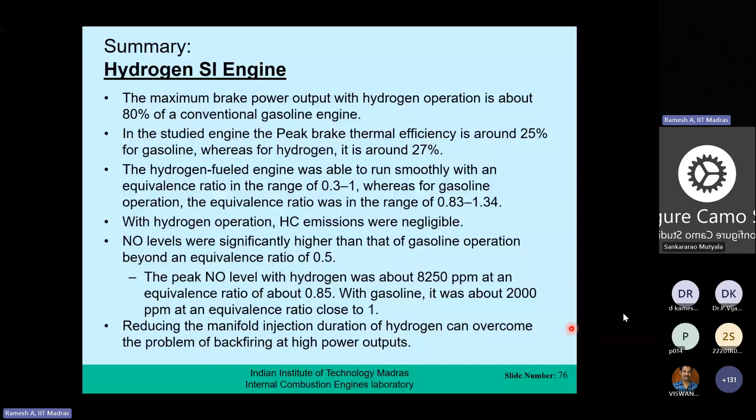Hydrogen can be used to enhance the performance of poor fuels like biogas, which have low efficiency and high HC emissions. Using small amounts of hydrogen, you can significantly bring down the HC and also raise the efficiency. NOx levels do not go up, and the engine becomes more stable. About 10% of energy from hydrogen is enough, and this can be used for stationary applications.

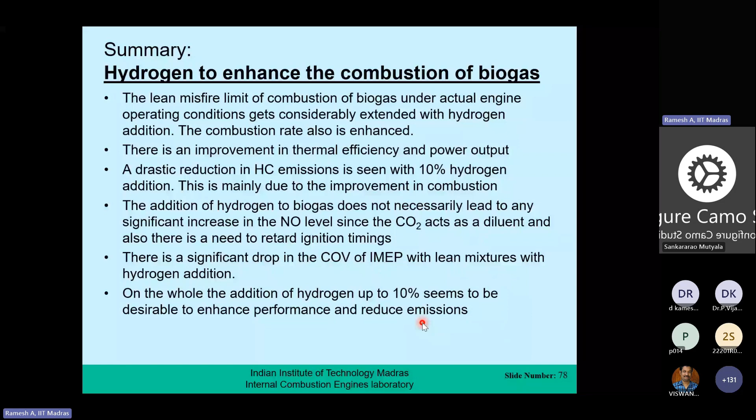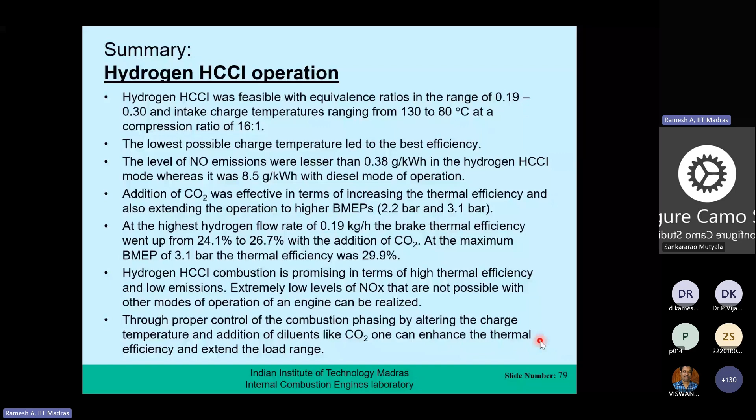Hydrogen HCCI operation is feasible in an equivalence ratio range of 0.19 to 0.3. Efficiencies are much higher than diesel. You have high thermal efficiency, low emissions, and extremely low levels of NOx that are definitely not possible in any other mode of engine operation. Proper control of combustion phasing by altering the temperature and use of diluents is required to extend the load range. So this is what we see with hydrogen.

So hydrogen is a promising fuel, but there are many questions to be answered: how to produce hydrogen, how to store hydrogen, how to transport hydrogen. These are all issues which have to be solved before hydrogen can be widely employed. But for stationary applications, and for places where hydrogen is available as a byproduct of some industry, it is definitely a viable fuel to be initially used.

Unless hydrogen is produced from a renewable source, it doesn't make much sense to use hydrogen, because if you are using electricity to produce hydrogen and that electricity comes from coal, it does not really serve the purpose, because anyway you will be emitting CO2. So hydrogen use is something like electricity use -- one has to very carefully think about how it can be used.

Production of hydrogen is one of the key things to be addressed before hydrogen can be put to wide use, because its source is very important. Hydrogen is always thought of as an energy carrier -- you have surplus electricity, you can produce hydrogen and store it, and then use hydrogen as a fuel. So it's a sort of energy carrier. Of course, there's another way of using hydrogen, that is the fuel cell, which I have not dealt with.